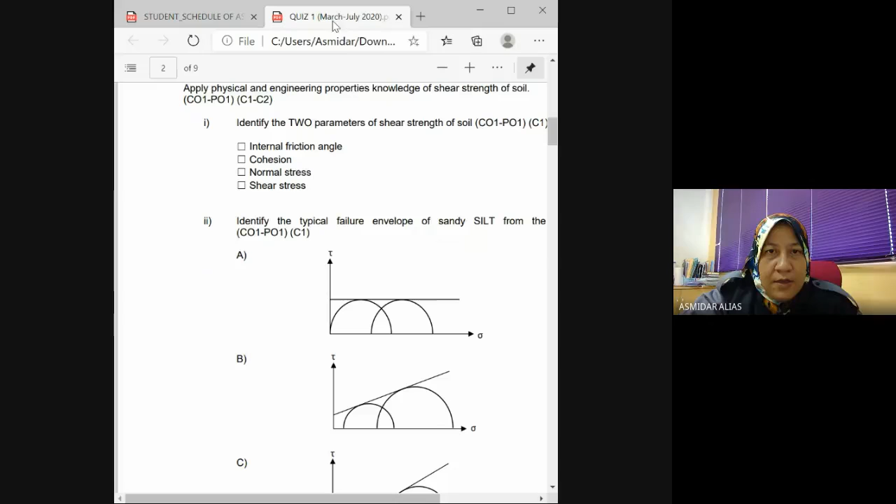So okay. This is the way they are giving you the question, but as I explained, your answer is using Google Form. Okay, my expectation is you do all the calculation using your own rough paper or whatsoever, but at the end of the day, your answer will be using your Google Form.

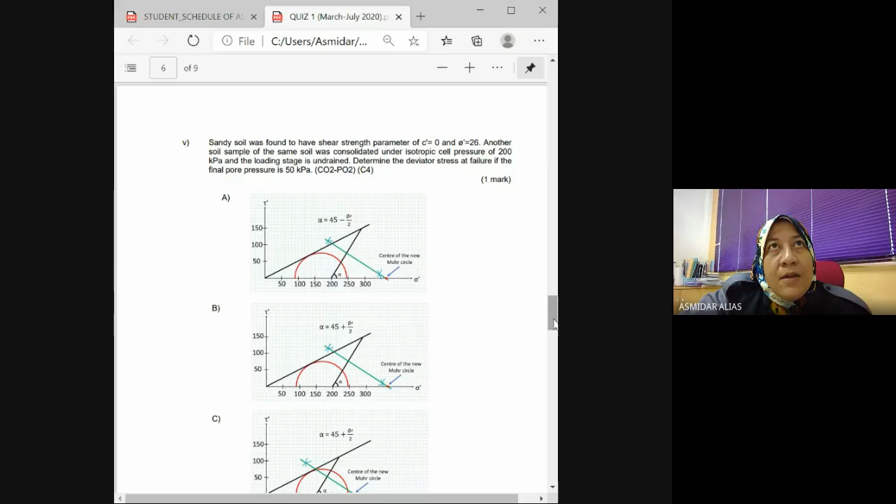So I hope that I give you this kind of exposure so that you can strategize yourself how you want to answer for your first assessment, which is your quiz 1. Okay, I'm finished explaining for the quiz thing.

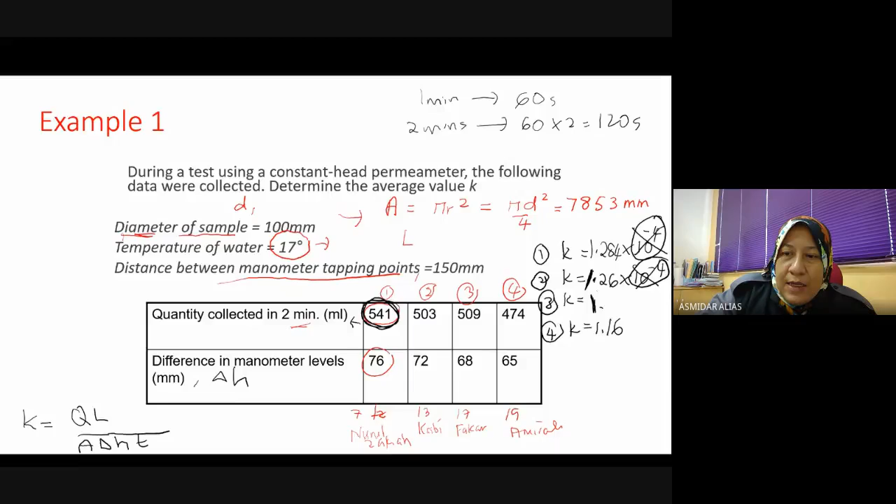Okay, yesterday we had 2 classes and both of you gave a different answer, but you can check back to get the correct value. At the end of your calculation you get the value of average K is equal to 1.15 mm per second. If they don't mention in the question, you always maintain your answer in mm per second. If they mention a unit, then you use the unit stated in the question.

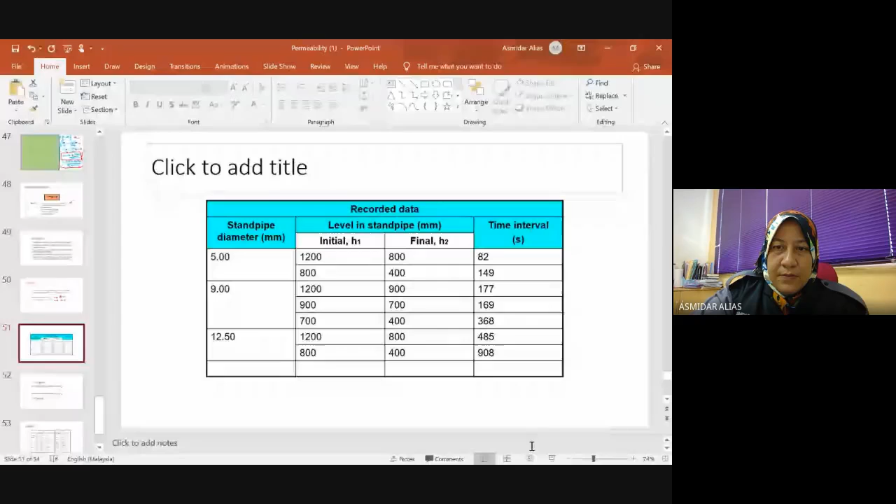Okay, for us to make clear what we are dealing with, of course you need to take the equation back. That will be K is equal to 2.3. Ingat tak equation apa dia? 2.3 aL log H1 over H2, bahagi A besar times T2 minus T1. Ada yang tertinggal? Jadi A besar.

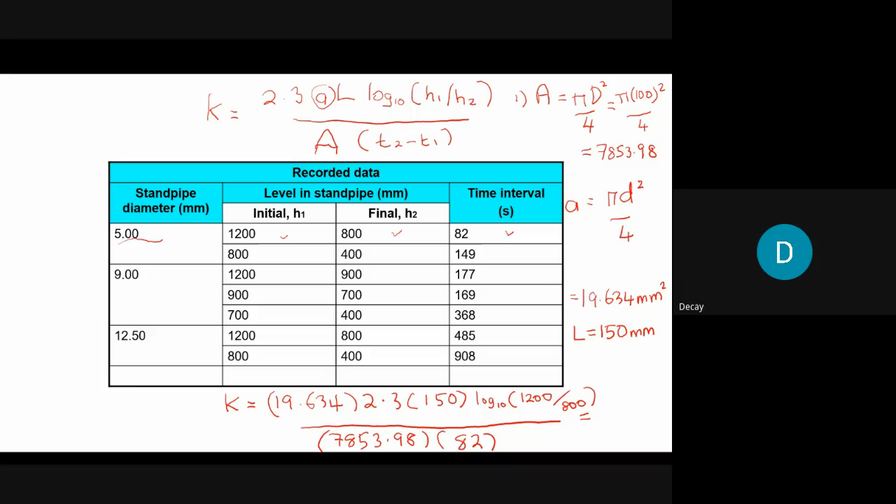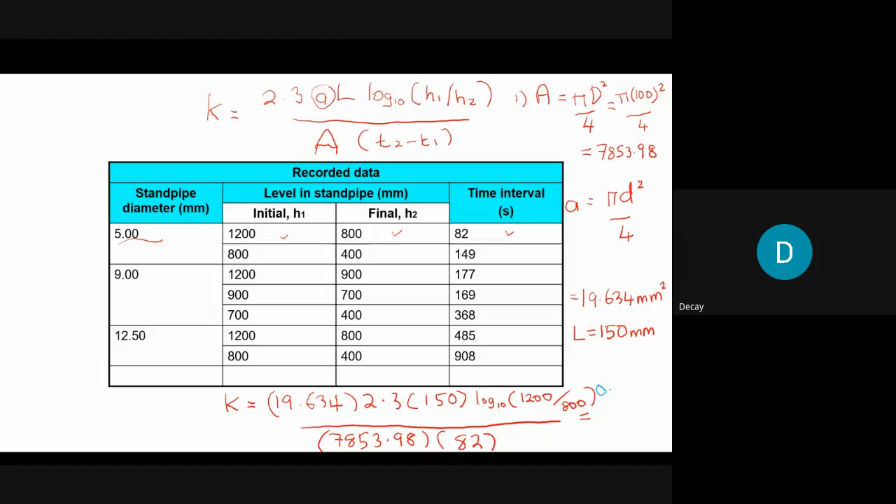So can you calculate this one for me? Saya dapat 0.33. Okay, I need two more answers to confirm. Okay, terima kasih yang jawab tadi. 0.333. Ada yang lain?

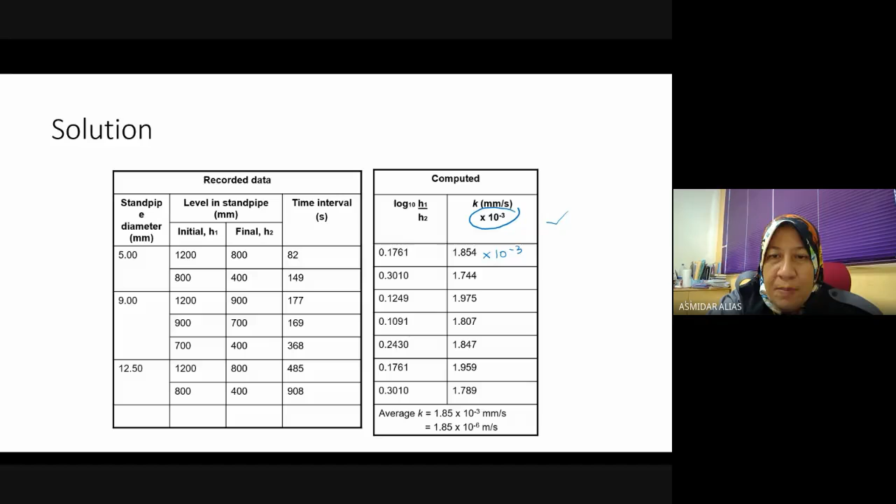So we get our average value which is 1.85 times 10 to the power of negative 3 mm per second. But again, you need to refer to the question. If the question asks, finalize your answer with meter per second. So you need to convert your initial answer to the specific answer required by the questions.

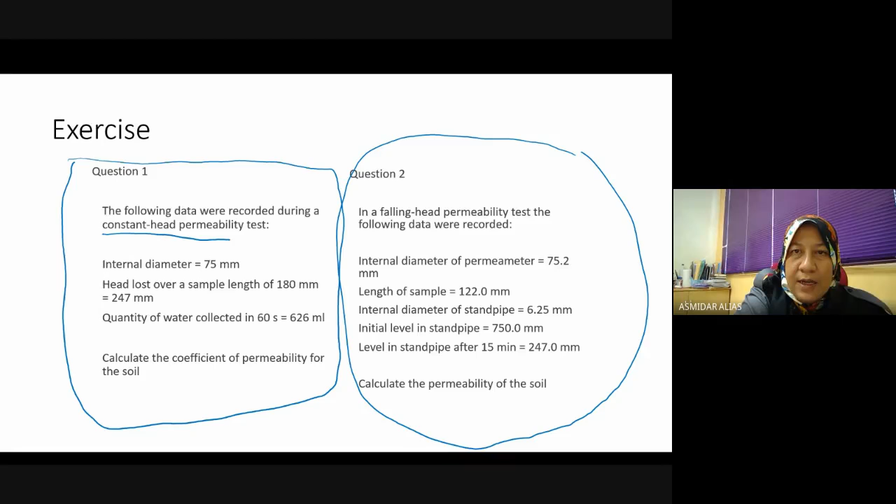But both of the questions ask you to calculate what is the permeability of the soil. So that will be end of our lecture for today.